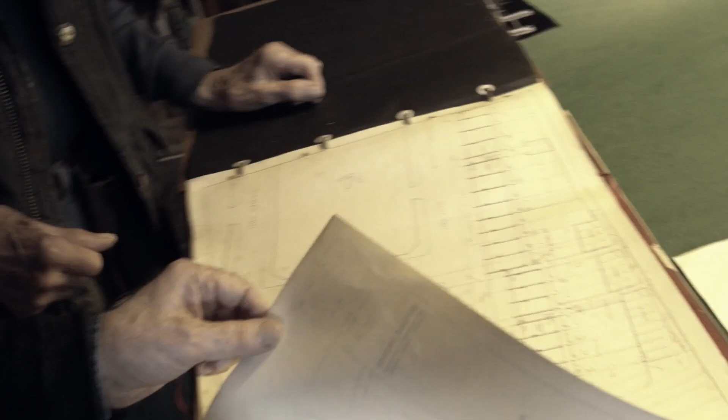Oh, is there a date? I've got my glasses. Oh, here we are, March '59. But it was the first scheme I got when I joined. I can't remember the circumstances. I don't think there were many great decisions to make. I think it possibly more or less designed itself.

I was born in Yorkshire in 1927. My father was on a local Bradford paper, and then he got a job on the Times in London, and finally we landed up in Sevenoaks, where I went to school. From school I went into the Navy for two and a half, three years, and when I came out I was living at home, and my father said, you can't live here anymore, you'll have to get out on your own.

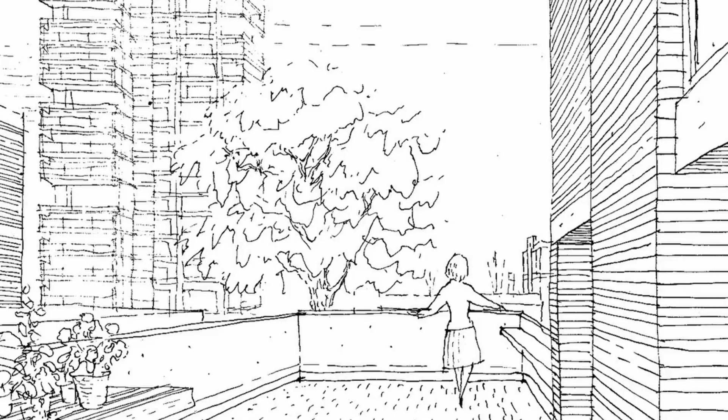So he went to the Citizens Advice Bureau and said, I have this boy at home and I want to get rid of him. So they said, can he do anything? I think my father probably had to think a while, and he said, he draws a bit. So they said, why doesn't he become an architect? He could train and get a grant. So my father came home and said, you're going to be an architect.

I went to the LCC, as it was. They took me on. It was a huge place, the architects' department. There were 600 qualified architects. I don't think there was anywhere else like it. I think it was the largest office in the world, actually, at one time. Quite amazing. There was some wonderful work went on there, and one could just wander around and talk to the various architects.

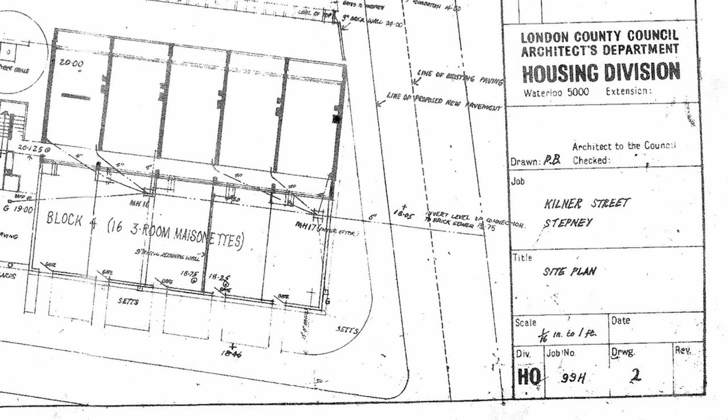And when I arrived, to my delight, they put me in with Colin Lucas, who I'd always, through my student years, revered. So it never occurred to me that I might possibly work with him. I got a job straight away, with two technical assistants, Martin Richardson and the other one was Tange. They were technical assistants, and I was grade three. They very much resented that, and thought I was rubbish. Anyway, we built this first place in the East End, Kilner Street, and they weren't quite so dismissive of me at the end of that.

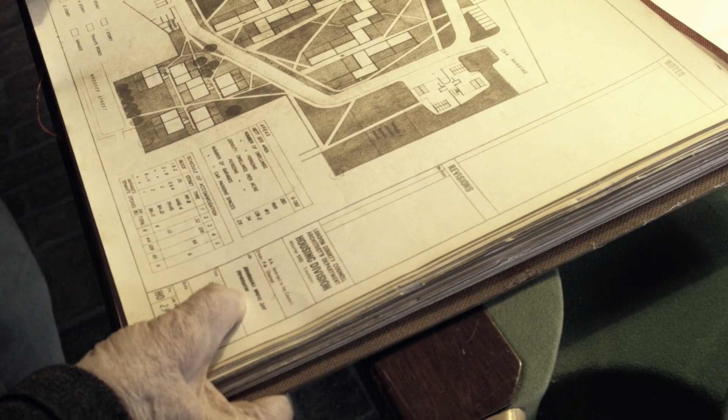And then suddenly Colin landed me with something called Brandrum's Works. Now this is the first scheme I did for Canada Estate. It was called Brandrum's Works Site, and this is in 1959. Right, so this was the first scheme I did.

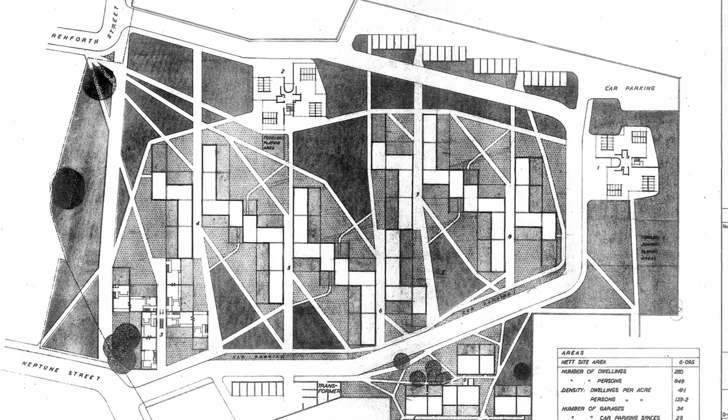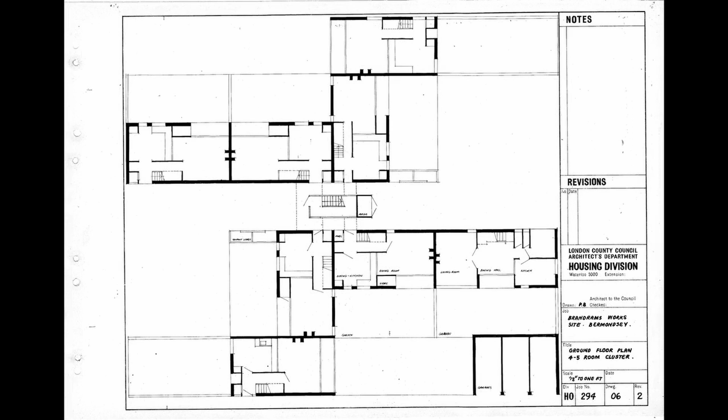Is this the one where the quantity surveyors came along and said it's too expensive? Oh yes, they always did that. Lloyd Wright was my great hero — I saw Johnson's Wax and the Taliesin East, Robie House, all those. Really wonderful. I go much more for the organic people. You draw it, and then you draw it again, and then again, and you refine a building as you go along. Proportions and things appear as you draw it, until you're happy with it.

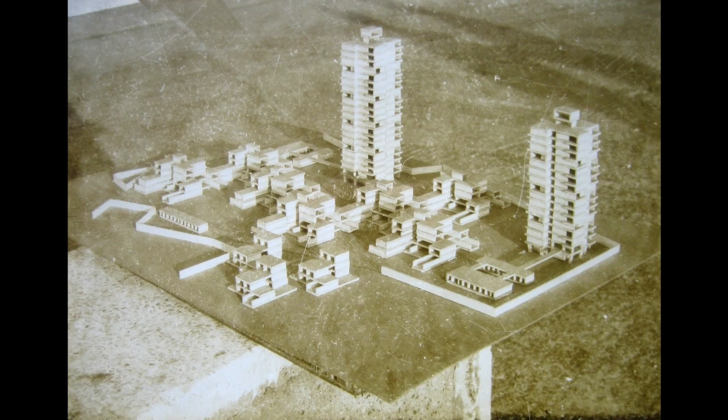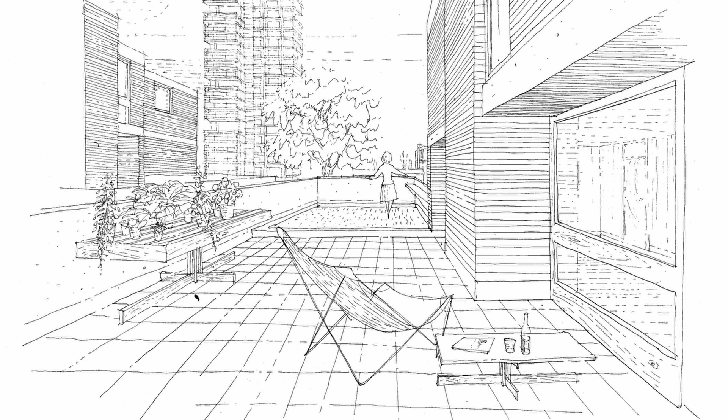This pyramidical one went to the quantity surveyor, as most of my schemes did, and came back with a black mark. The sections stepped back, yes, and there were roof terraces, which is why I suppose they were too expensive. It was my early days, from my point of view, and I hadn't really got into realising how you made things cheap — which was generally, terraces were cheapest. So I really was breaking away from that.

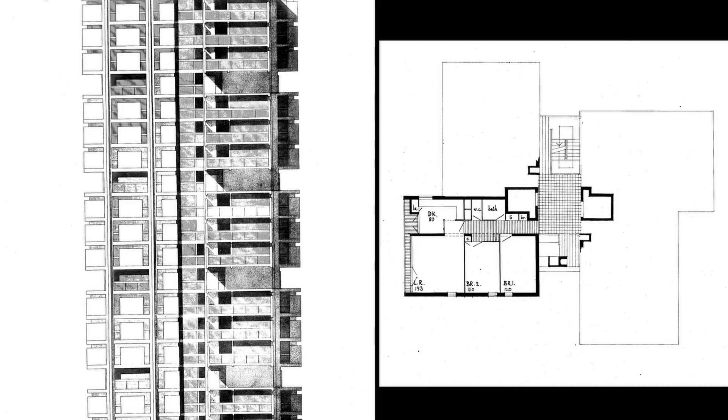I used to get several tries at things. Colin never said anything about this — he never interfered with anything I did. I hardly ever saw him. Well, I remember we were having a team discussion once, and somebody said, why did we put all the two-bed flats on one floor? From then, everybody said, yes, what a good idea. And that's how it happened. I can't remember who made the suggestion, but it was when we were talking as a team, and Colin was there. If it seems like a good idea, they say, why not do it?

One in Battersea - Martin had a hand in this. What he did was the layout, really, and then he claimed the scheme was his, which I think was a bit tough.

If we could do it in those days, why can't we do it now? How are they going to produce 300,000 dwellings a year? Anybody could tell them how to put the housing situation right, and they must know this, and they don't do it. I mean, they can't expect developers to produce social housing. Why can't the government see this and say it? Well, of course they daren't, because it's not in Conservative policy. I mean, it's pathetic, really.

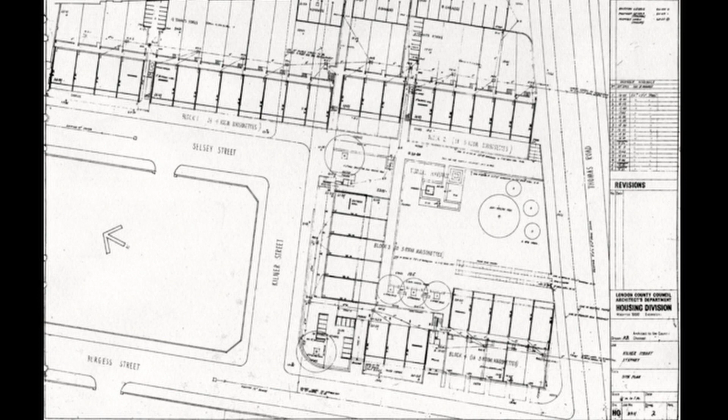I'll go through this phase, not really repeat it. Basically what he and Martin Richardson got was standard plans - 4-storey maisonette standard plans - and they clearly had fun doing the elevations, and doing the access way, the staircases, and how you put the refuse chute and water tanks together. You'll see this coming through in the later schemes. They really refined it down to what I think are quite beautiful ways of doing a very simple task.

Now I want to tell you a little bit about Frank Lloyd Wright, because he mentioned his attachment to Frank Lloyd Wright, who was famous for developing what was called pinwheel plans. I won't go on too long about this - some of you may know all this stuff, but for those who don't, it's worth pointing out.

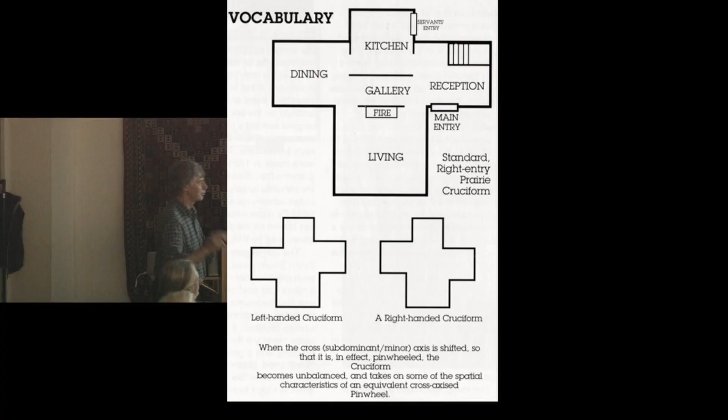When he was doing his Oak Park houses, he started out with a traditional American house - you had a brick fireplace bang in the middle - and then he slowly put the rooms around and spread them out, starting with cruciform type plans. But then he developed pinwheel plans, where you're non-symmetrical and have an asymmetrical entrance. On the left, that's a diagram of his own house, where you can see the volumes of the spaces have slid away from being a cross into being the pivot of the fireplace in the middle with spaces radiating around.

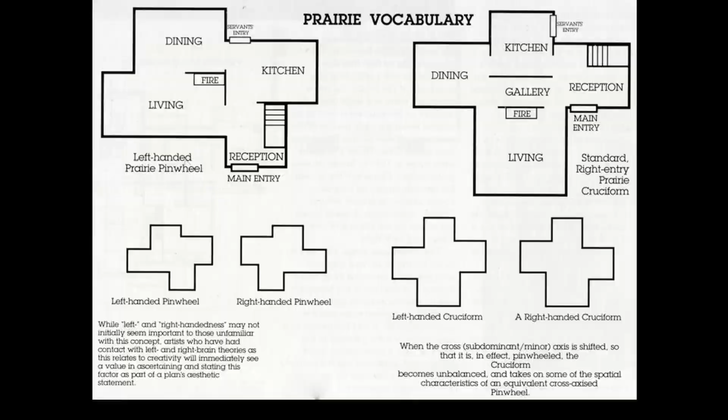So in terms of the spaces, you get a circular movement when you're moving through the houses, and that was something he developed a lot. That's a real house, not quite there - that's a cross, a cruciform plan, just so you can see what the real rooms are like.

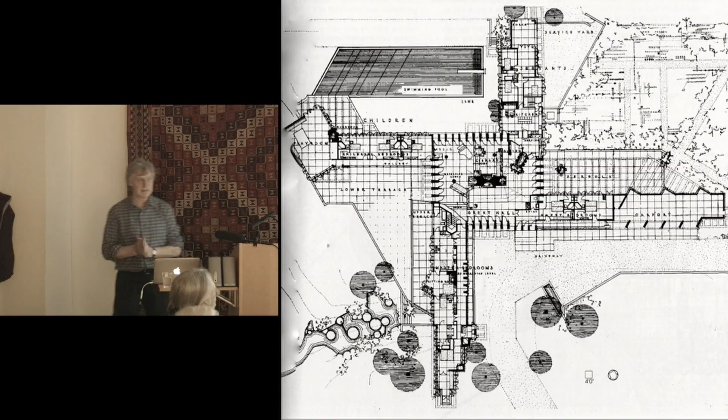This is the Darwin Martin house, a very complicated example. It has cruciform bits in it, but it really has the most dramatic use of pinwheeling. Phillip Bottomley definitely said he went to Johnson's Wax, and if he went there, he would have seen Johnson's house, which is the most pinwheely of all pinwheels.

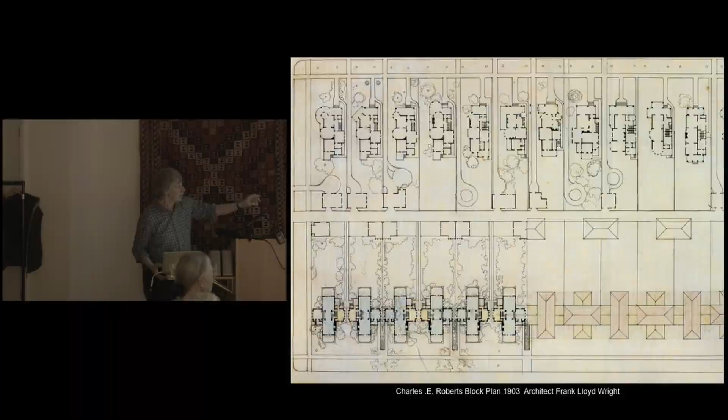I throw this in because this, again in Oak Park, is the only grouped housing scheme Frank Lloyd Wright got - for Roberts, who owned a whole plot. Initially Frank Lloyd Wright dreamed up the conventional thing of two rows of houses, but being Frank Lloyd Wright, he said, if you do it this way - divided into square plots with pinwheel plan houses rotating round one block - you get asymmetry and movement not only in the houses but between the houses themselves. That's a blow-up of one of the blocks.

What he also did then was push the four houses along the diagonal lines, moving them in and out so that you've got asymmetrical pinwheeling spaces outside as well as inside. To finish off, that's the Johnson house in Racine, where you can see the fireplace in the middle and the radiating pinwheeling spaces whizzing off.

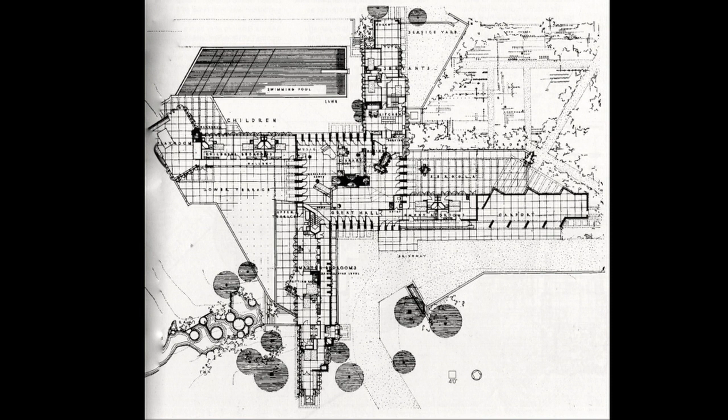He went on, and later, in the late 1930s, the diagonals came right together - pinwheeling houses joined into a pinwheeling spinning thing. That sort of thing looked like that - that's what they looked like.

Now, if we come back to Phillip Bottomley and his Canada Estate Bermondsey scheme, it consisted of the two very tall blocks, and then lower blocks. What you're looking at are elevations - a photo and a drawing he did. You can see the elevation is asymmetrical in that on the right-hand side the bays protrude forward, and on the left-hand side you see a recessing bay, which is in fact the side of the same plan turned 90 degrees.

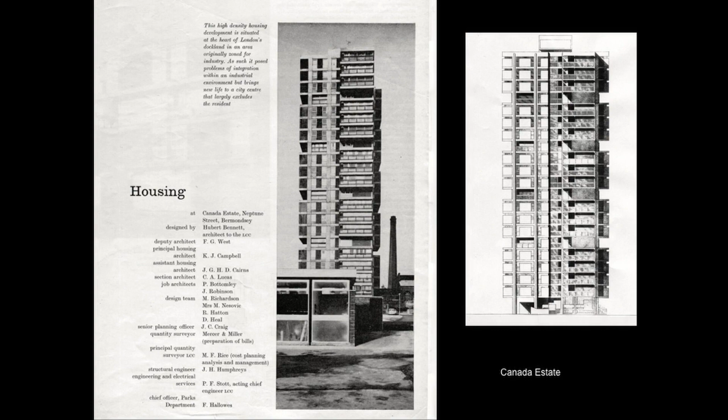Don't worry if you don't understand that. I'm going to show you a plan where it's a lot easier, and they look like that.

There on the plan you can see the two tower blocks. It's a pinwheel plan with four flats turning out around the main block. On the low blocks, what you get is a separated out staircase, and again three blocks served.

The idea of pinwheeling is he's taken it on and applied it both to the internal plan. This is the AJ version of the internal plan of the tower blocks you get on this scheme. So you can see there it's not a fireplace in the middle, it's the access in the middle. You come up and get the same plan.

These are two bed plans turned 90 degrees to each other so that they slide past each other, so you get the form on the outside. But what you also get, in terms of light and aspect, is three different aspects in each flat.

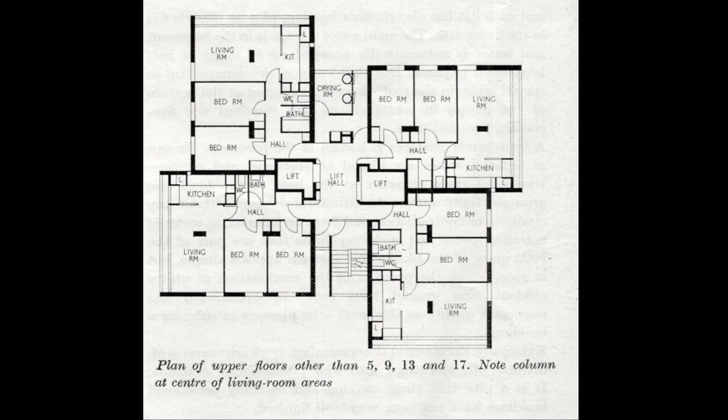Some are better than others, but if you look at the left-hand plan, you'll see its living room has got a column in the middle of the room. At the end, the kitchen has a tiny slit window, and it repeats as they go round.

The reason for the column in the middle is that if you go on every fourth floor, you get what he called the one bed flats. They're pinwheeling the same way, but not quite so protruding, and you can see in the thin lines where the two bedroom ones are sticking out around on each side.

What you don't see there that you do get is that for the lift shafts, where they're cast, you get rounded corners. They're quite small, quite tight circulation spaces, but they're all rounded on the corners going up.

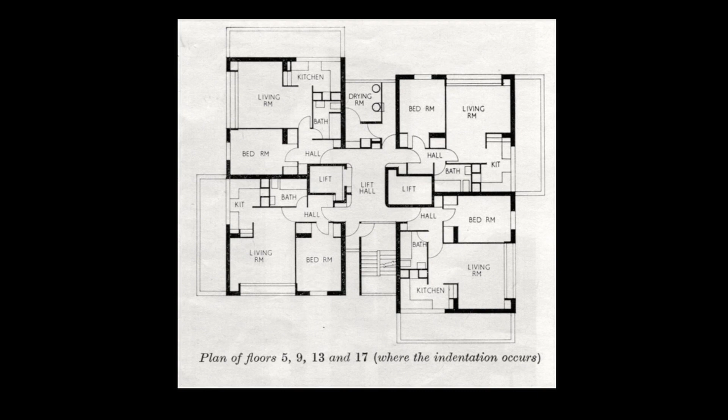This is the scheme as built. The ground floor was made higher, so you come off it and have a ramp to adjust the levels of the site, which looks like that. And look like that—these are all original photos.

Now, that's the scheme as built. I'm going to go backwards now, through the design process. You know when he was talking about quantity surveyors—this is back in '59, whereas it was built in '62, '63. So there was quite a long period of going through it.

One of the things John Partridge said when Judy and I spoke with him was that at Roehampton, the lovely concrete unités and towers were all quite expensive. In order to subsidize and get the thing built, the low red brick, very simple maisonette blocks—now under big threat—were done cheaply to keep the costs fitting together properly.

This is me talking about pinwheel again. I've said it to you, so that's it in writing.

We're going to talk about the low blocks, because this is his early scheme, first scheme for it, which you saw him looking at. There you can see that the tower blocks are much the same—they're solved, they're done, there's a solution for them. But the lower ones spread out quite a bit.

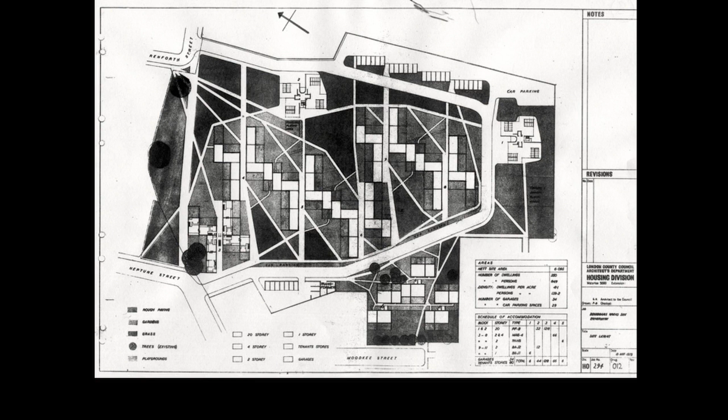You can see that they almost join together in some places, in others they don't, so you get these sliding spaces in between them, these routes that come from where you get into the site, spreading diagonally through spaces with these repeated pinwheels across the site and into the corner.

Just to quickly go through this, don't take too much time—there's the plan of what goes on inside these things. On the ground level, they're very wide, very expensive. Poor chap—no wonder they got cut.

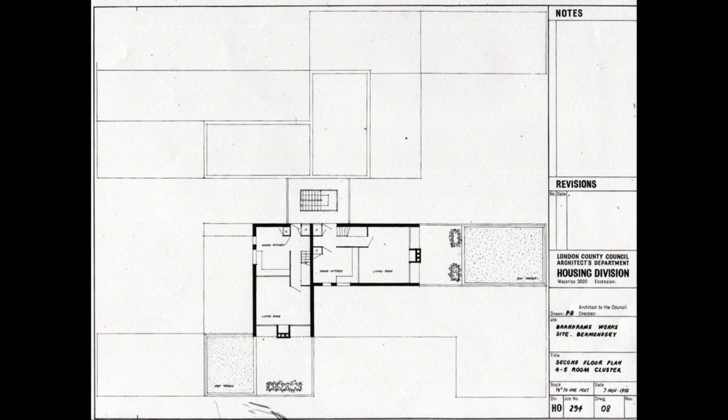Then as you go up, they step back. Where you can see the white, you get terraces outside, and turns, and quite a variety of actual in-between space right in with the blocks. I mean, they do break down.

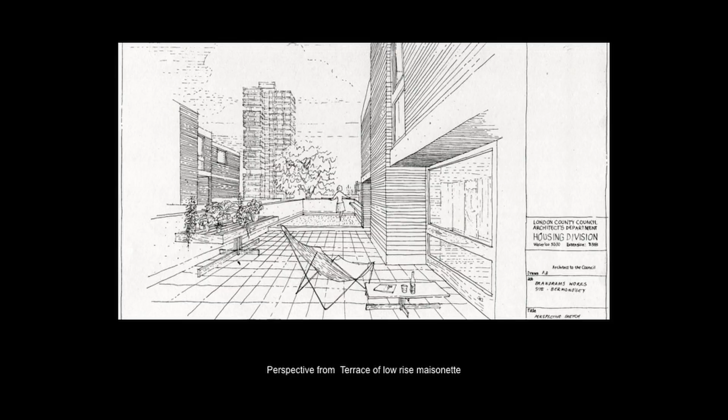That was the rough model we saw of how that was all put together, and we've seen this picture before. That's one of the terraces you got from these little pyramidical plans that weren't built, but it's a lovely drawing of a lovely idea.

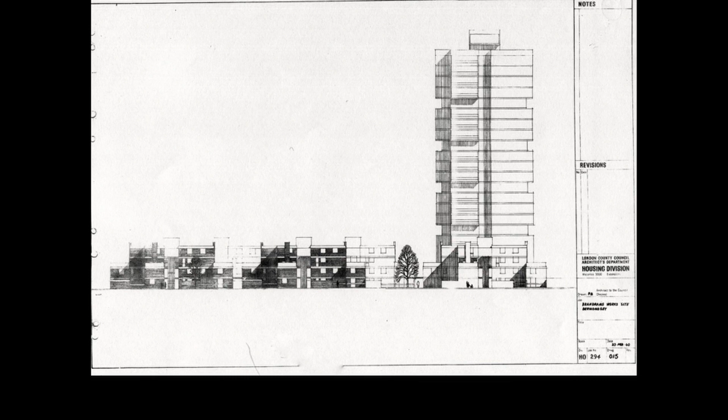You can see there, close up, they spent a lot of time on it, rather like the sort of thing Stirling and Gowan were doing at the same time. After Ham, they did some odd houses where, with asymmetry, they didn't use pinwheels, but a pinwheel plus asymmetry within it. That's what got built.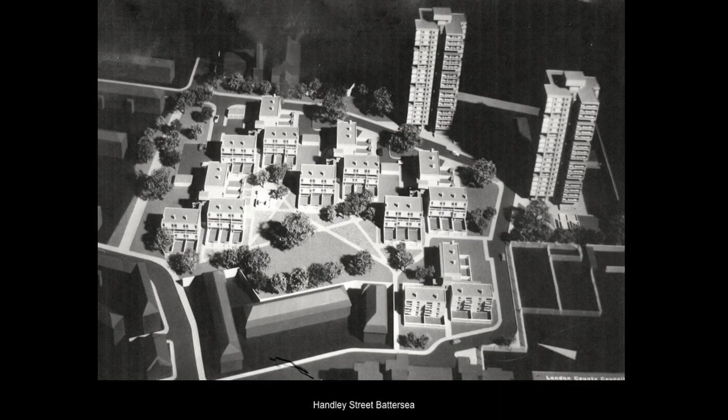So the pinwheels got simplified into 4 story maisonettes, 3 bays each in each block, but the stairs are in the middle and they rotate about them, but not quite so dramatically. These are the smart models. There you can see that it's a lot simpler, so the spaces in between become simpler, but you do get more of a variety of large and small, and we'll see in the other scheme we get some very interesting spaces happen.

Originally, like this with the gardens and the paths and the planting, that was the as-built plans. You see basically simple maisonette plans like the first scheme, so I think the QS was happy with those, and it got built.

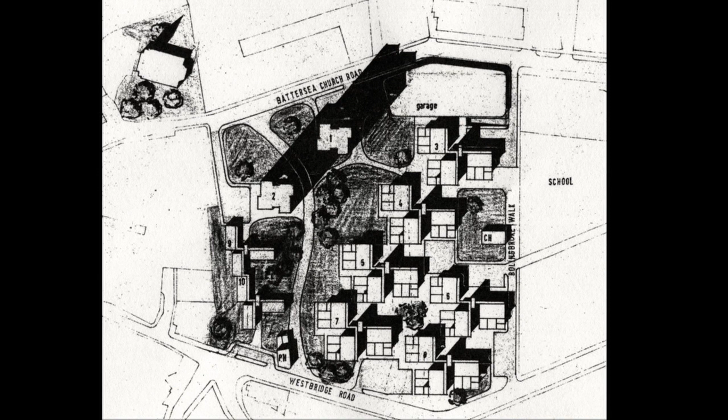This is in Battersea, the repeat scheme. The Thames is up on the top left-hand corner. Here you can see the two tower blocks, and again the pinwheel lower blocks of a more conventional nature, not spreading out like the rather nice early ones.

On this one, they tried the tower blocks in different positions, overshadowing and views from the Thames. They spent quite a bit of time doing that, and you can see here the spaces, the routes through, the ways in that are widened out.

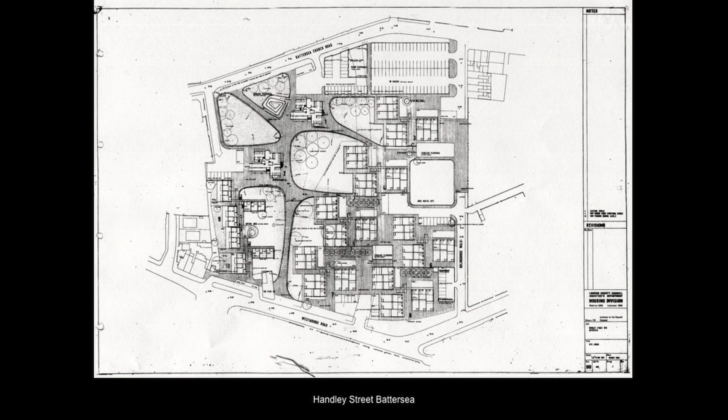This is his layout drawing. When we were interviewing him, he stopped on this drawing and he was almost absorbed into it when we were talking to him, because it has in it quite a number of elements. You saw him opening this nice drawing that is now in the V&A drawings collection.

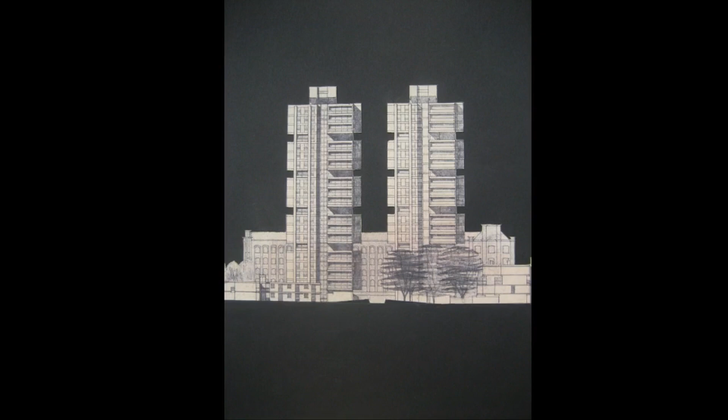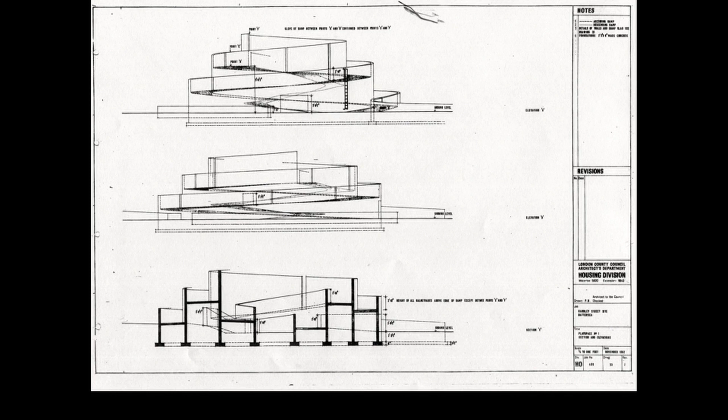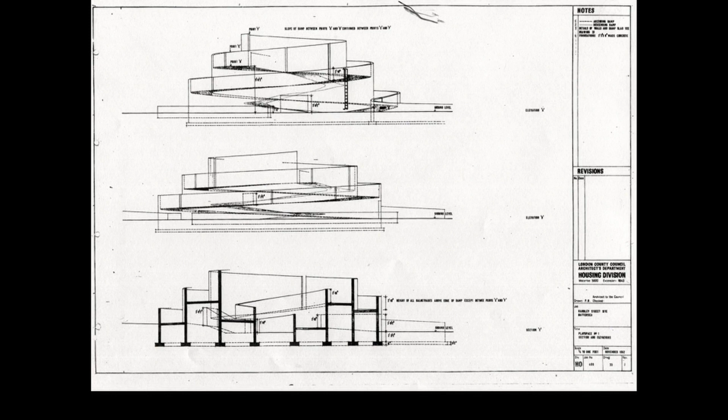Anyway, he put a lot of work into it, his initials are on this drawing. It's a play space where you go up and up and up a ramp, and then there are tunnels under it as well. Ramps and tunnels. And he decided, no, you couldn't, it was too dangerous. They wouldn't do it, but it would have been a beautiful thing.

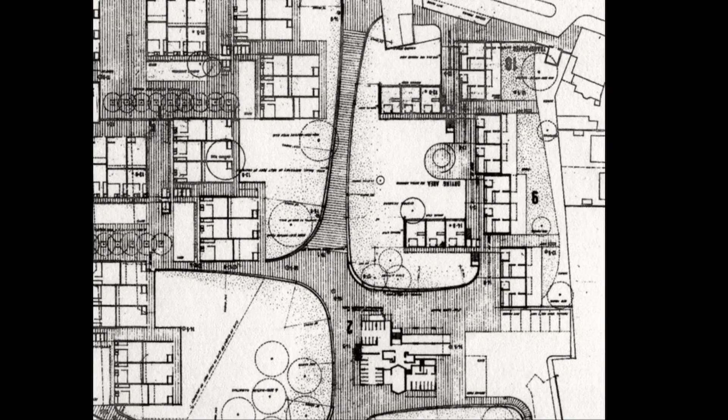Looking at that a bit closer still, so you can see what is so really good about this is the way you get in and out. You have these very tight, quite small staircases, only concrete, and they're incredibly simple, and they're very open, easy to use, easy to keep clean.

I remember doing some of the big layouts at home, and it was much easier to work at home. I did that at home. I remember hatching the... yes.

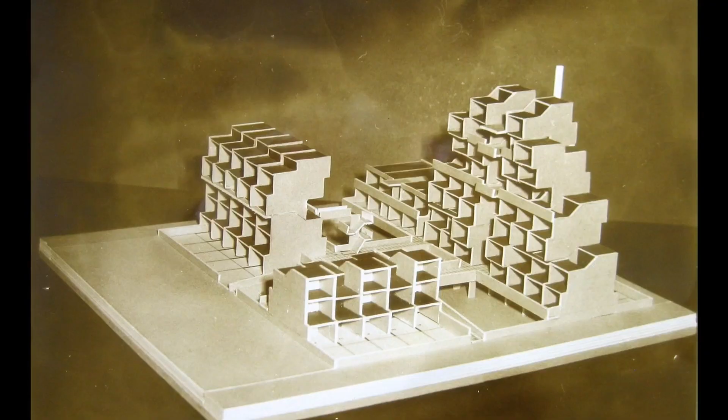I think there's a photo of the model here. That was quite high, isn't it? Look, 1, 2, 3, 4, 5, 6, 7, 8 storeys. But the smaller dwellings go on top, there with a lift. All the other ones are houses of 4 storeys. It's trying to get repetitions, some sort of economy. But I wanted to get as many houses on the scheme as possible.

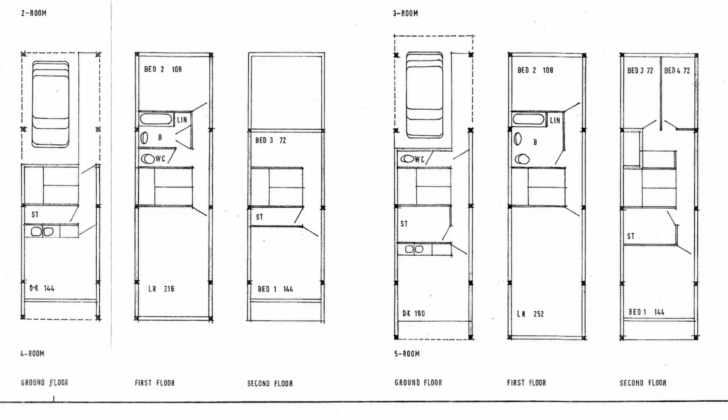This looks like it's a frame construction. Structurally, it was based on a 12-foot square frame. The idea generally was that they could have been, if need be, prefabricated in some way, and not be too prescriptive about that, so you left yourself open to contractors' knowledge or that sort of thing.

At this stage, one was still talking in principle. You didn't know who you'd get landed with. In those days, of course, they were encouraging system building. By 1963 they would have been, heavily so. One tried to persuade and develop schemes which were susceptible to system building in some way.

I had to decide which of these types to use. And because Colin didn't seem to know what I was doing, when we got the quantity surveyor's report, it was too expensive. Anything was too expensive.

I got told off by the powers that be and threatened with dismissal unless something was done. I then had an illness brought on by the work, stress. In fact, my eyesight went.

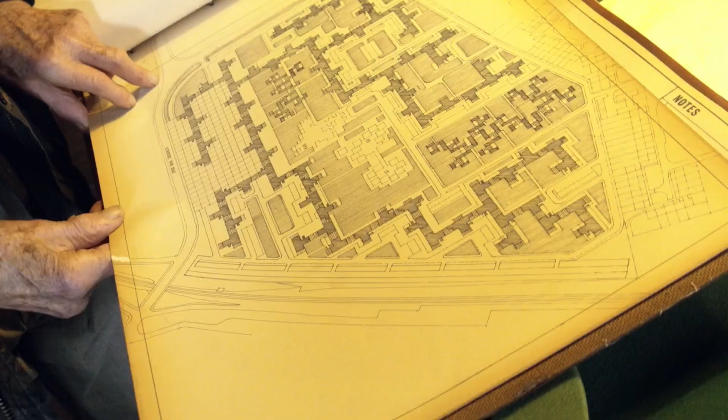So I wasn't able to work on the cheaper scheme, which was put up using the plans, but in a different and more economic way. And by the time I got back, it had virtually been drawn up. Where was Colin Lucas in all of this?

No, he didn't enter into it. He kept out of it, and I just had to face the music. But I expected that in many ways. I honestly didn't want poor Colin to suffer from my mistake.

One thing I want to say is I'm going to follow up the Frank Lloyd Wright thing, to do with the practice of architecture. Frank Lloyd Wright nearly always did houses again and again and again, and he did over 800 of them. So he was dealing with the same type of process and product, and developed through it.

That also happened in offices like this, like the LCC, where you did one scheme, then you could go on to another. Clearly Phillip had demonstrated, with the little money he had at the start, that he could get a job done, which is why he got the tower blocks and the others to do. And on this one, clearly he went off doing his thing and got into trouble for it. I'm going to go through what he did, because what's interesting is what he did afterwards, which I hope will come clear.

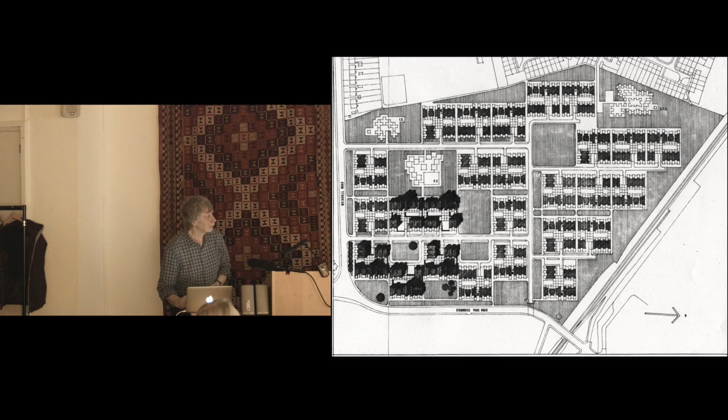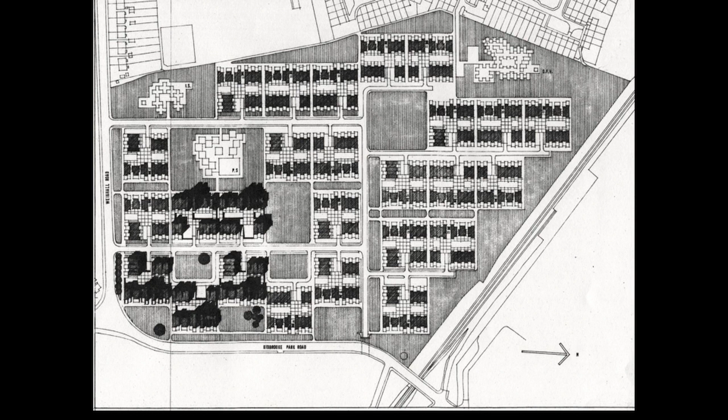That's the scheme he showed you. You can see there is a large site, and he's doing these parallel terraces of different lengths. They're almost all in the same direction, but some go at right angles. There are little bits, and there's a children's home as part of this - I think it's just a children's home, not other sorts of buildings.

Yes, this business of studying what you could do with housing and what dimensions you should use preoccupied lots of people. It's more famously shown, in the fourth paragraph down, by Colin Wilson and Alan Colquhoun's Bentham Road. They struggled with a sort of Corbusier unit - could it be 12 foot, or should it be 12 foot 4, or 11 foot 8? They worried about that.

So did the Roehampton group - they worried about getting things down even to 11 foot. Goldfinger didn't deal in feet, he dealt in inches, so he liked to do things in multiples of 11 inches, not quite a foot. There was always a preoccupation about what multiples of things you used when dealing with housing.

Which is actually increments of rooms and increments of houses or flats. What you got with the scheme was that the emphasis on car parking was coming in - you had to have a very high proportion of cars to the number of units, because you thought car ownership was going to go up.

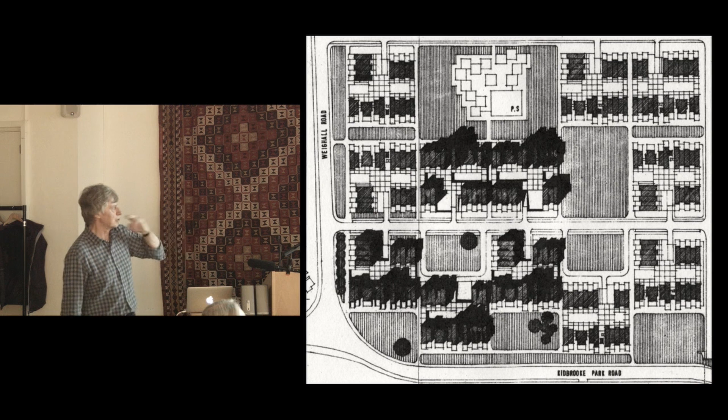And that affected the way you thought about doing plans at high densities. Instead of the earlier schemes, they were broken down into different sized blocks, so that if you were trying to rationalise things, you had to deal with the car. You can see here a constant 12-foot width, with varying length - as you get bigger dwellings, they expand out, but the core part stays the same, where the staircases are. They stay in the same position.

In this, a lot of people got hooked on the idea of half levels at this time. Half levels meant the staircases could be pulled into the spaces of the rooms as well, and you didn't necessarily always have to have little landings. You had landings sometimes to do with means of escape in case of fire and stuff.

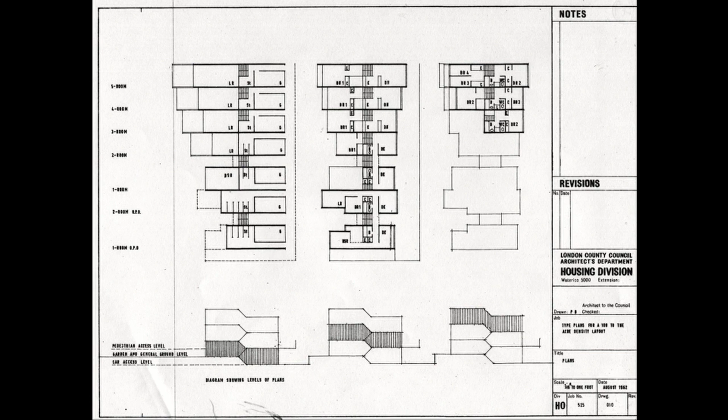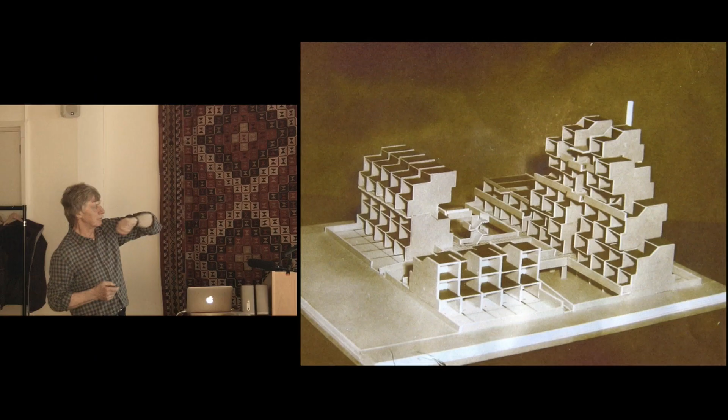He spent this time thinking of how you did that, and showed this lovely model with houses. You see quite tall blocks in the same plane as each other, and one at right angles. At first floor level, you've got these little bridges - what's happening is the cars are slotting in underneath. There are road layouts that come along and slide in, so on your narrow frontage you've got gardens on one side and car parking on the other. That causes certain other things to happen.

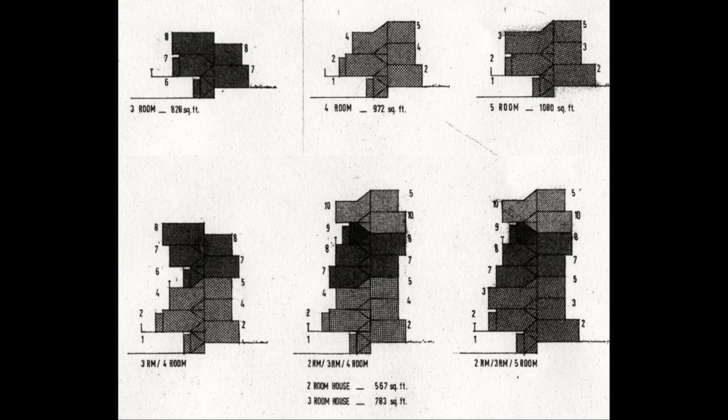He's just stacking them up, how you could put them together and get various combinations, so you get a great variety of sizes. At the bottom, the ground, you get garage in on one side and gardens out on the other side. So what happens between the terraces? That's a bit bigger, so you can see more of what's going on.

What's the frontage now? 12 foot. There are 2 rooms, it must be. Oh, the thick wall, between the thick walls is 12 foot. Now, some of them have got bigger, you're quite right, James. They did grow, but other interesting things happen.

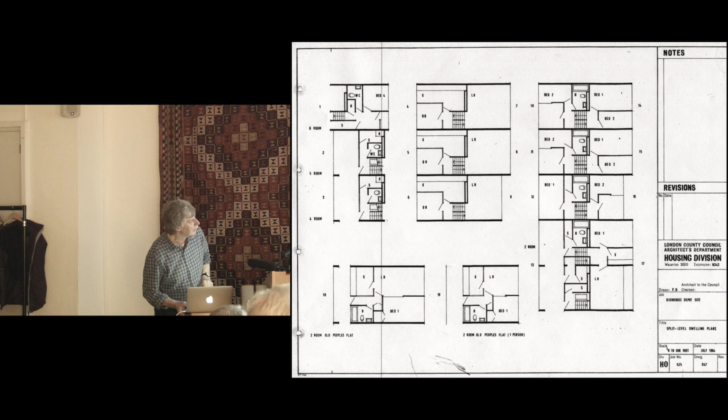So that's putting them together, and what happens is you have a lower one with a garage under it so you can use the lower spaces on the next terrace along. But there, some of the accesses come up to 2 or 3 stories above. This is his basic one we were looking at, where you can see the cars on one side and the staircase - those are all 12 foot, all right?

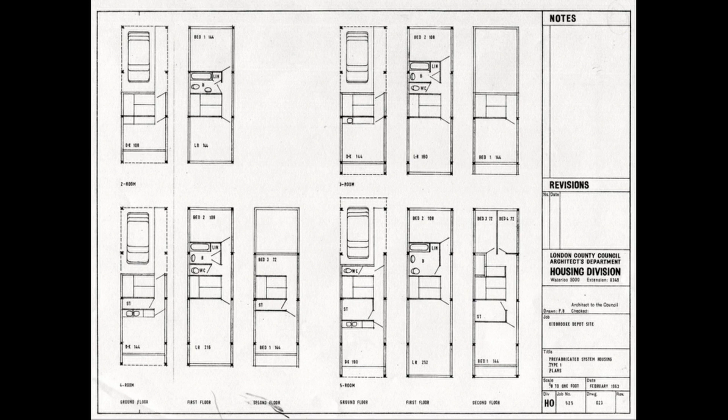And he's got columns. Then he started thinking, why be stuck with these party walls running in this rigid pattern, which was rather limiting? So he started branching off and not using the same types, so you could have a variety of spaces going in. He got right away from his earlier approach - they got wider for bigger ones, because he's suddenly thinking of a 12-foot square grid and expanding these things into that sort of space.

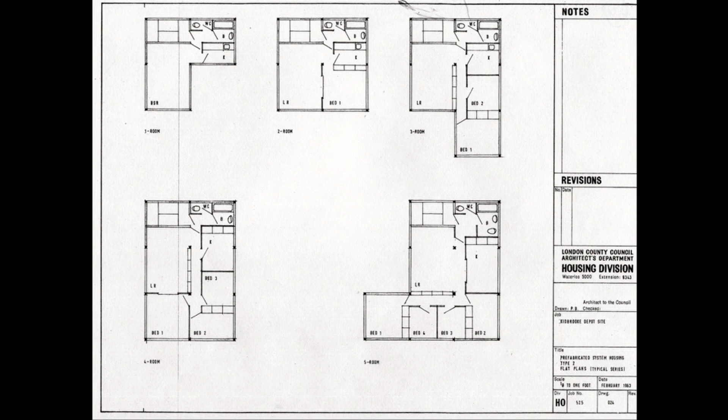A lot of people were doing this at about this time, but he clearly spent a year or so doing it, and got quite a variety, quite a vocabulary built up of how you put together various sized units.

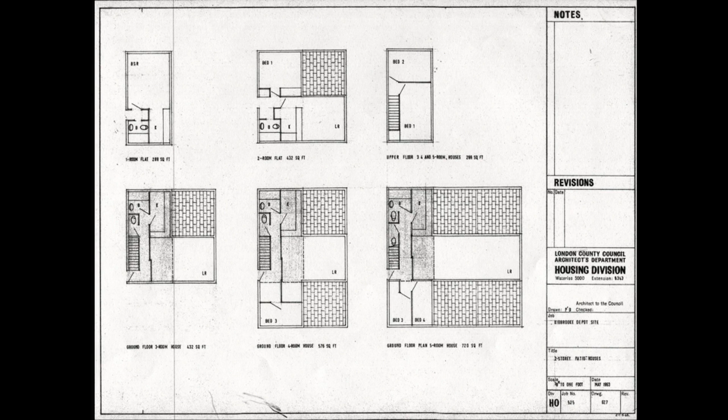So you've got terraces on higher ones, and then if you had smaller ones, you could leave the ground floor completely open, with staircases sliding around. You could do that with the windows and things too, and they were becoming more sort of poddy.

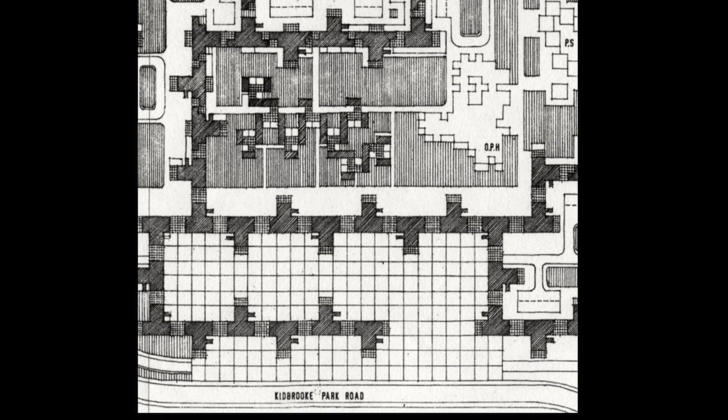He clearly did this layout for the estate, which came a cropper, and he had to take time off. As well as that, you can see in between, in quite large spaces, there are smaller buildings going on, some of which are the little single ones building up in a complicated pattern.

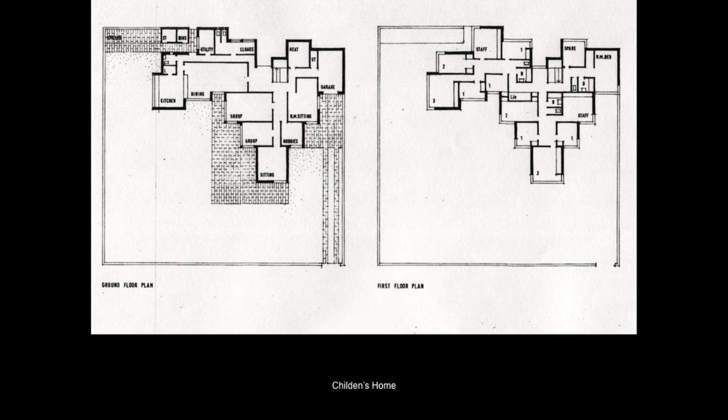Others where he did a children's home, which is staggered in this way. It's nothing like the scale of Van Eyck, but it's breaking things down into units - no system at all, quite free. I don't think that got built, but there's a rather nice drawing of it.

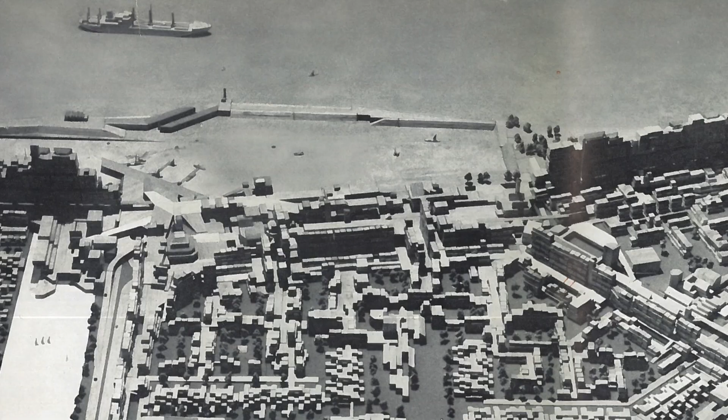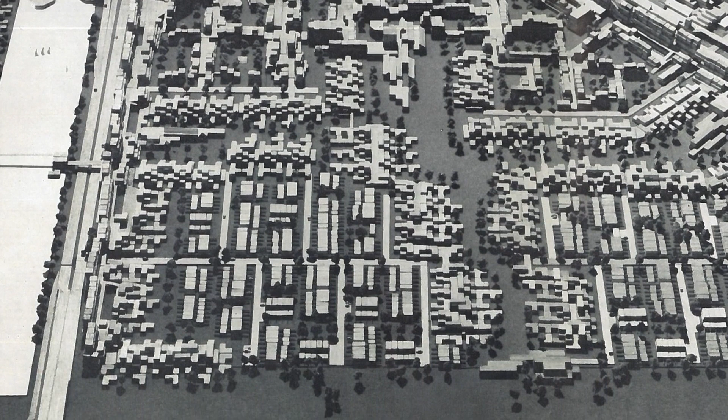The planner suddenly produced this plan, which he had decided summed up all the discussions we'd had. He hadn't been asked to do it, he just produced it overnight, in the way I tended to produce things overnight. And it took off from there. As soon as you put something down on paper, it gives it a life of its own. And this plan, difficult to dispute it.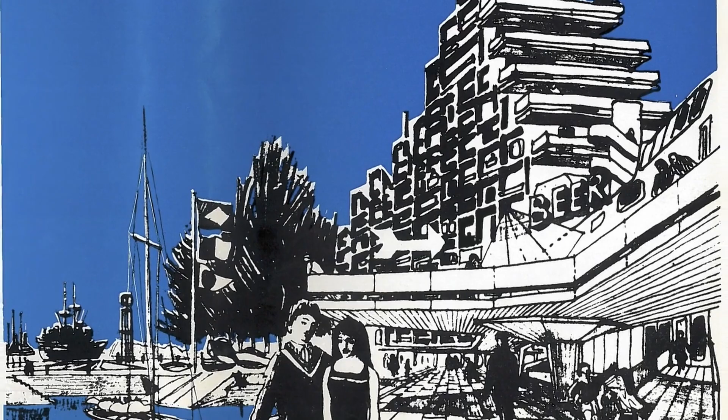Those drawings I did.

The site was part of the Woolwich Arsenal, so it hadn't been developed at all. It was covered with places where they stored explosives, and each of the stores had a little moat around it, so there was a great deal of water on the site around these moats. It was really wonderful.

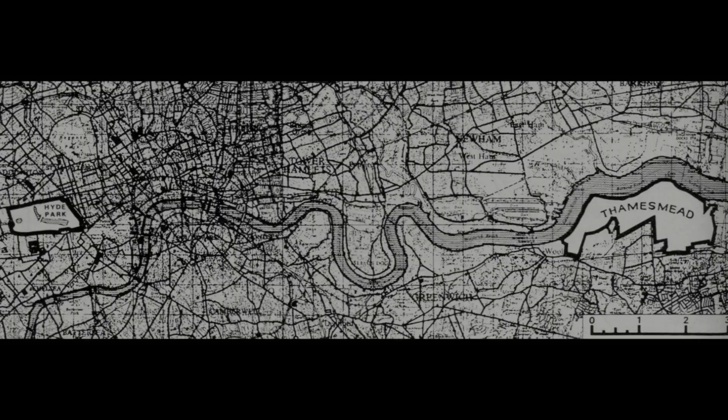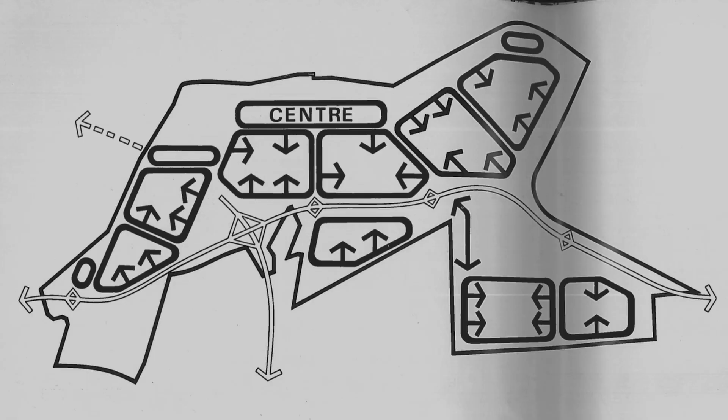When the GLC acquired the Woolwich Arsenal site, Thamesmead had already been developed south of the main road. We saw, during that period, when they were building the first part of Thamesmead, we acquired the Woolwich Arsenal site. Then the powers that be, primarily in that case the deputy architect Jack Whittle, decided it needed a new team.

I got involved in that as the housing representative, and there were some planners, a chap called Hackett and his deputy. Norman Engelbach was put in from civic design.

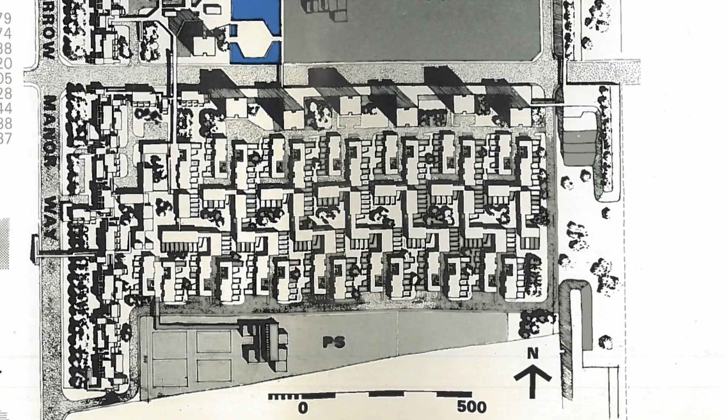He was a very good man, good choice I think, but totally unlike the other people. He was erratic. He'd sit there doing very little for a long time, probably thinking, and then he'd suddenly say, 'We're going to do this.'

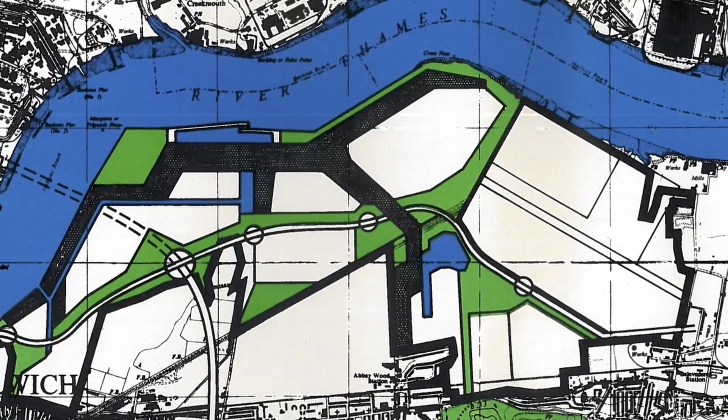To do a master plan is totally different from doing an individual building - it involves so many skills. And if the people don't altogether gel... I mean, most of us did. It was a big team actually, not just the four of us.

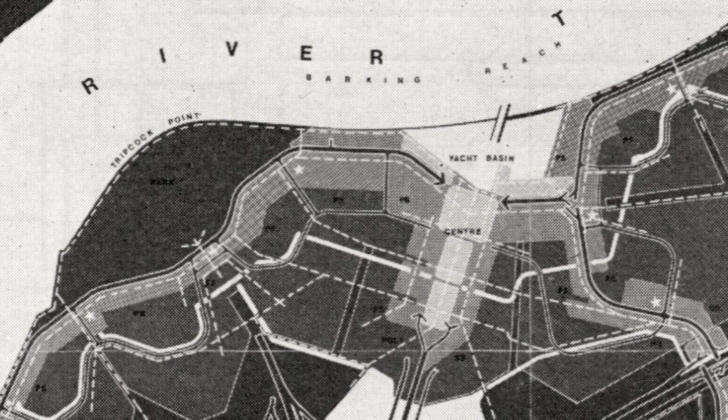It would be surprising if there weren't disagreements. The awful thing was that a decision was made by Jack Whittle that he wanted the town centre to be on the river.

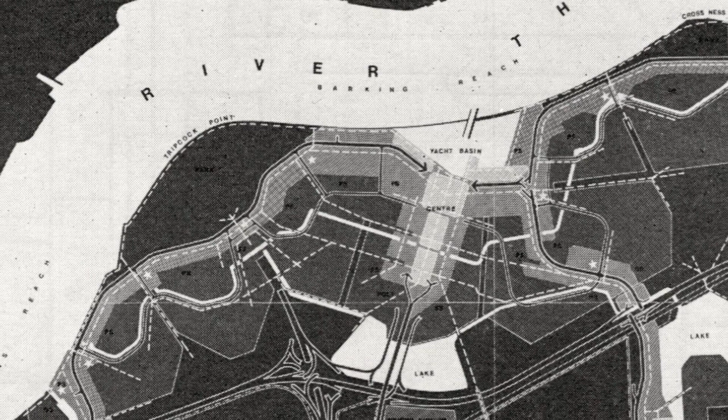Now, it's very difficult to develop a town centre when you haven't got the housing round it. Well, for the infrastructure too, isn't it - the roads, and the railway, the whole thing. They don't want to be by the river, do they? No, they want to be further.

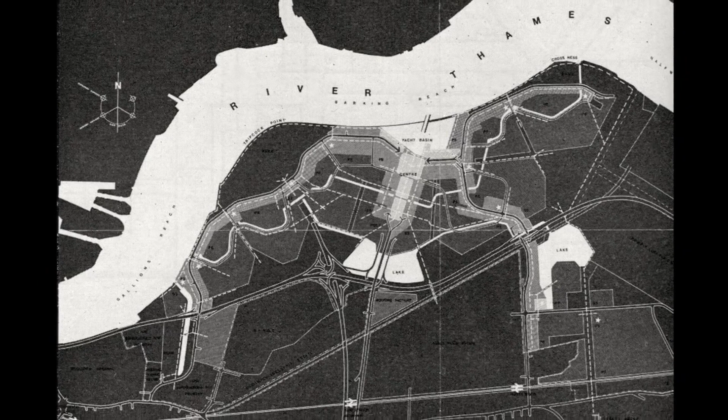So the whole master plan got developed around putting the town centre there. I think it was always an error. The centre should have been in between the existing development and the new one, connecting the two - it seemed an extraordinarily sensible decision.

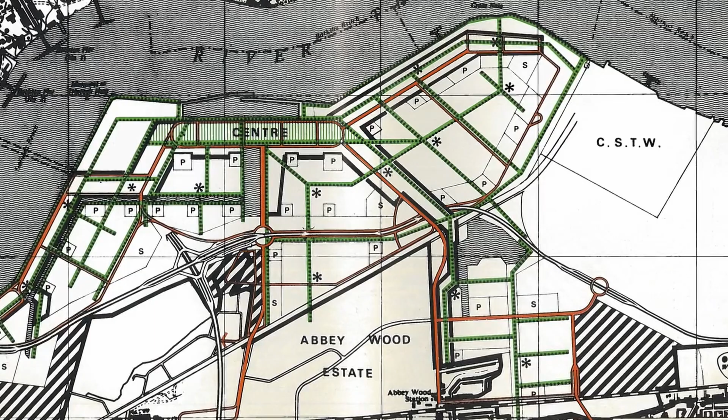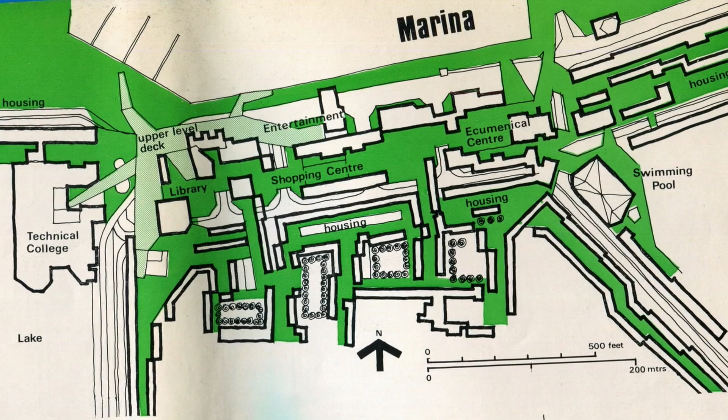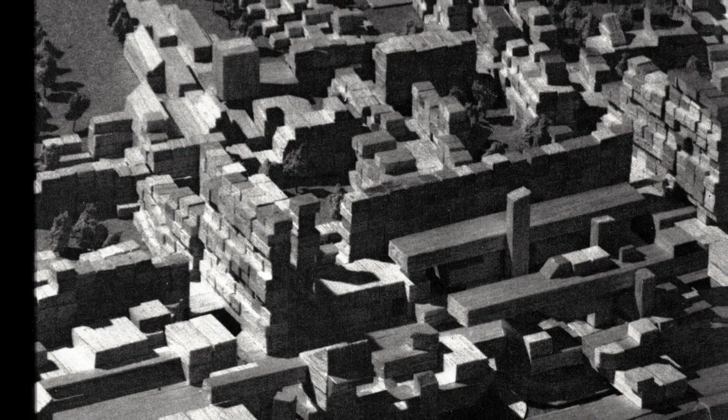But as the deputy architect had said it must be on the river, we had to base the whole master plan round putting the centre there. And that was disastrous in my view. But what can one do? You get one rather strange decision, rather arbitrary, without research or anything, without consulting the existing planners, and in the end the whole town developed around that.

Because of this business with the town centre, I think it was never really going to work. But it hasn't done. The awful thing about doing mass housing is you live with it forever. I mean, there's no day that passes that I don't worry about what I did. It's a huge burden.